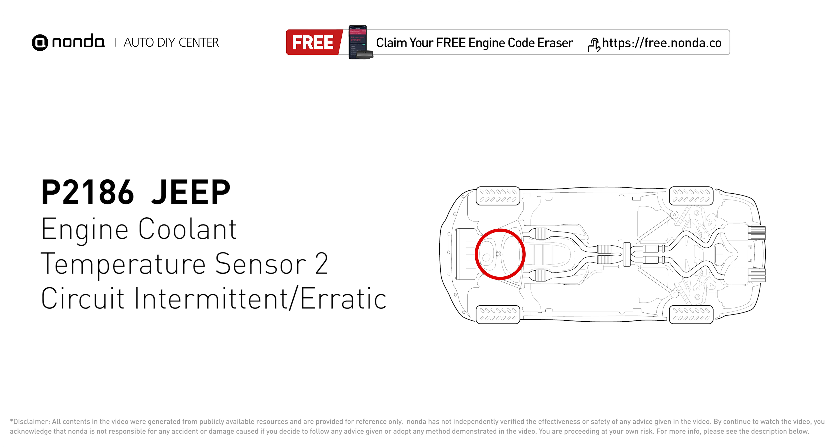This code is set when the PCM detects an erratic or intermittent voltage in the control circuit of the number 2 engine coolant sensor. Here are 3 of the most practical solutions to fix Jeep's P2186 error code. Method A. The ECT sensor.

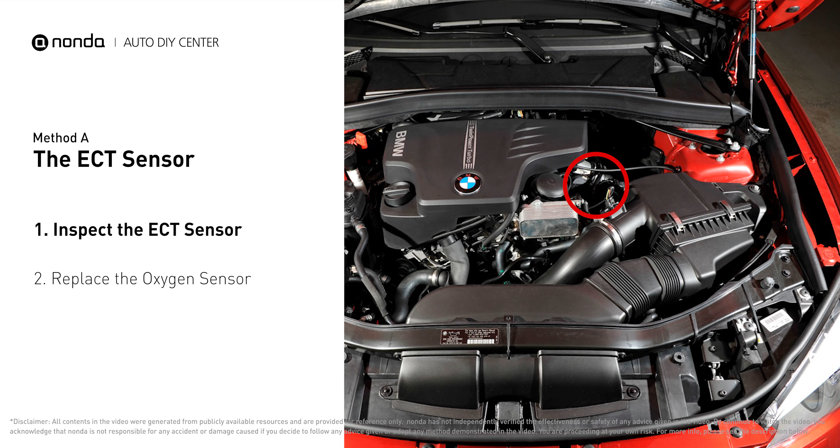In most cars, the primary ECT sensor is installed near the thermostat in the cylinder head. Remove the ECT sensor from the engine. Use a multimeter to proceed with a test on the ECT sensor. At the ambient temperature of 68 degrees Fahrenheit, the sensor resistance is between 2000 ohms to 3000 ohms.

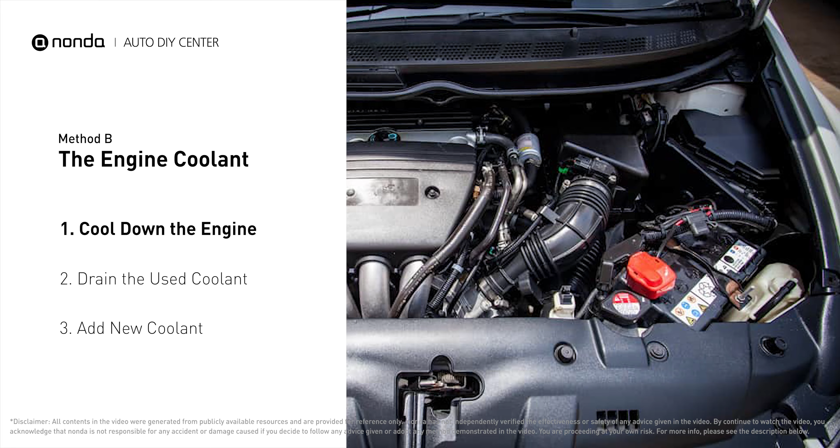If you do not get a reading, this indicates that the ECT sensor is faulty and needs to be replaced. However, if the ECT sensor has a correct reading, then we will proceed with Method B. Method B. The engine coolant. Engine coolant reservoir is often a translucent white bottle, and the radiator is the large panel at the front of the car. Cool down the engine and remove the radiator cap.

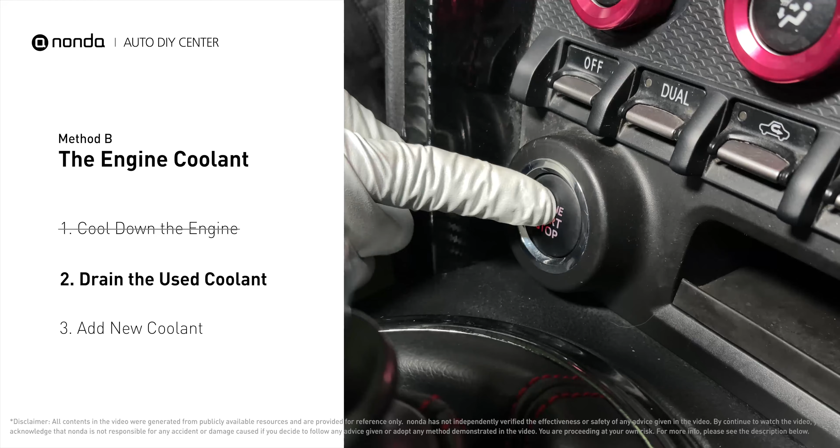Locate the radiator lower hose. Place a container underneath the hose. Remove the hose and allow the coolant to drain. To better drain out the used coolant, start the engine and turn the temperature control to maximum heat. Closely monitor the coolant temperature gauge on your dashboard to prevent engine overheating.

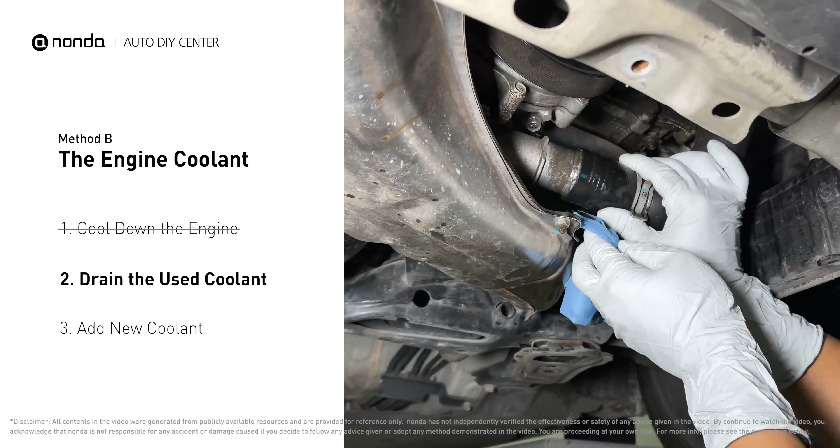Once the used coolant is drained out completely, turn off the engine and replace the hose. Next, add fresh coolant to the radiator until it reaches the base of the filler neck. And then take off the cap of the coolant reservoir, fill it with fresh coolant, not exceeding the full line, then replace the cap.

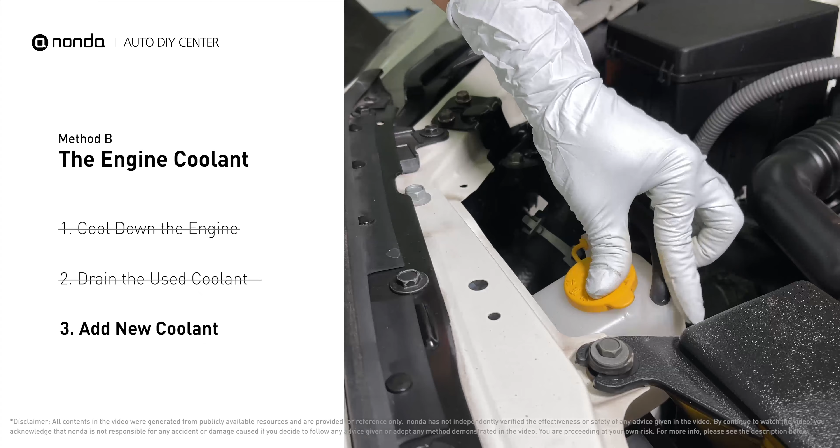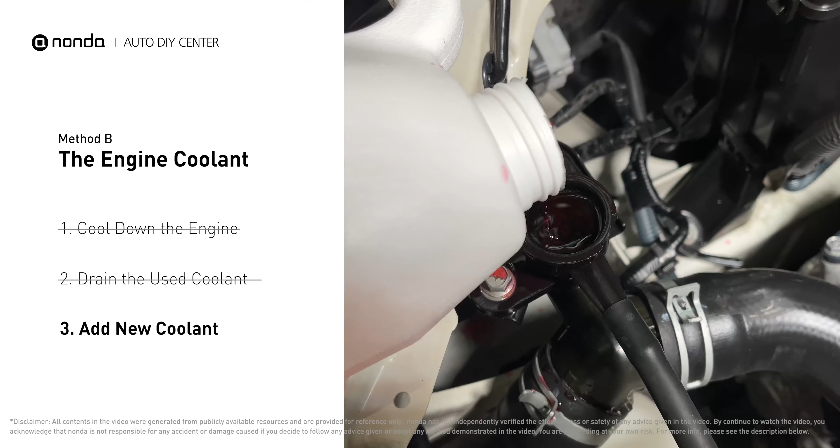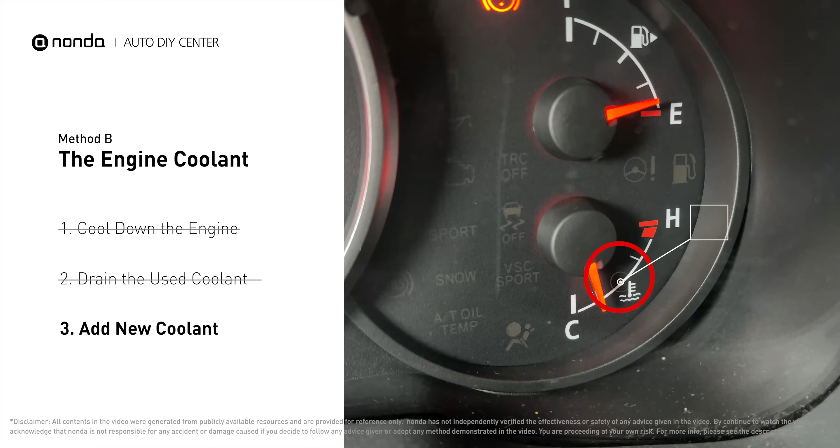After filling, start the engine, and let it idle for a few minutes to let the system purge all the air out, and then add coolant as needed. Replace the radiator cap. Closely monitor the coolant temperature gauge on your dashboard. Once the coolant temperature reaches 190 degrees Fahrenheit, turn off the engine. After the engine has completely cooled down, remove the radiator cap and add coolant to its full level.

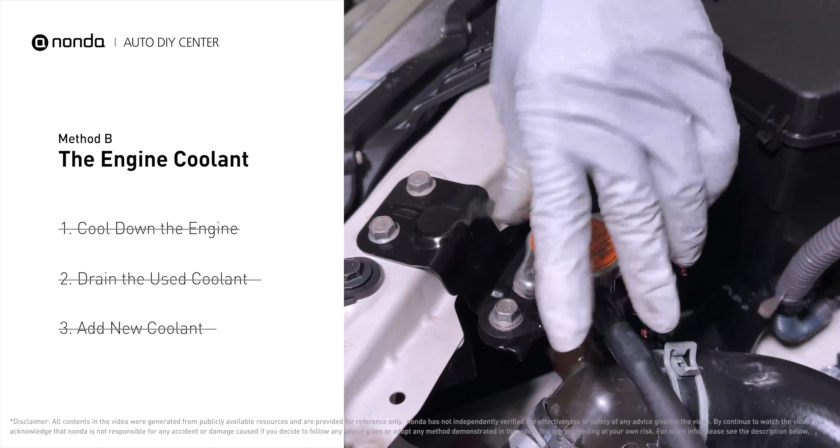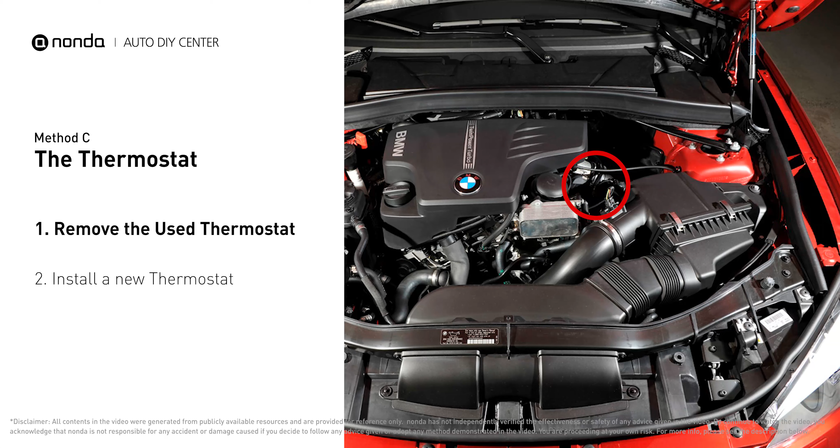Method C. The thermostat. In most cars, the thermostat is placed near the water pump on the cylinder head. First, carefully remove the thermostat from the engine. The engine has to be cool before attempting the process, and then install a new thermostat.

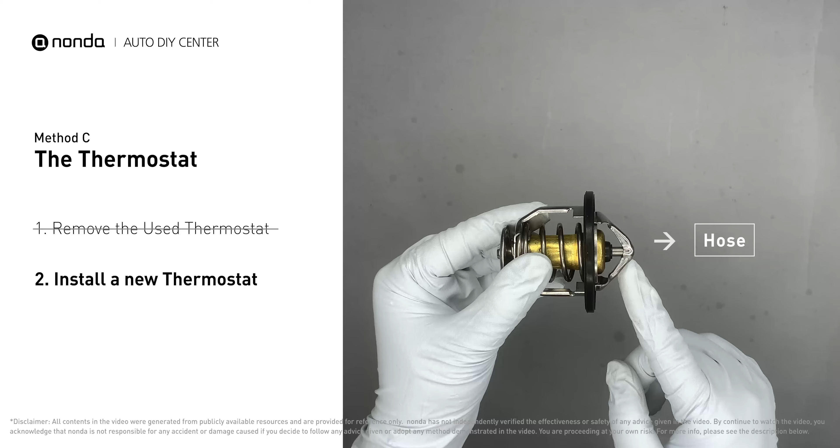To install it correctly, you need to make sure the short end goes toward the hose, and the deep end goes towards the engine. When you install it back to the engine, make sure the jiggle valve is pointed straight up to the top of the engine, so the air can get through the system.

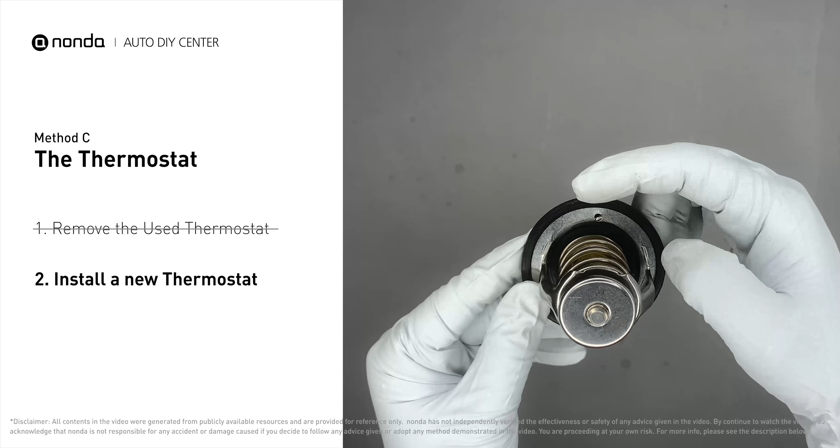So here are 3 of the most practical solutions to fix Jeep's P2186 error code. After the repair, you can now use the ZUS app to clear the error code. And tap the rescan button one more time to make sure everything is fine with your vehicle.